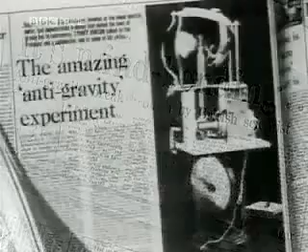So had Laithwaite come up with an anti-gravity machine, a device which could rise in the air without a source of energy to propel it.

The issue has never been fully resolved to anyone's satisfaction. Most people believe it absolutely didn't work, and others believe that it worked very well, and there was a conspiracy of some sort to cover it up.

Ezekiel is describing a flying, spinning, glowing, metallic object that ascends and lands in front of him.

In the modern age, what we see are flying, glowing, spinning, metallic objects that ascend and descend, just like the objects that are described in the Bible. It's not an illogical conclusion to assume that these craft that we see today may be the exact same craft that they're describing in the Bible in ancient times.

Their construction being, as it were, a wheel within a wheel. When they went into any of their four directions, without turning as they went.

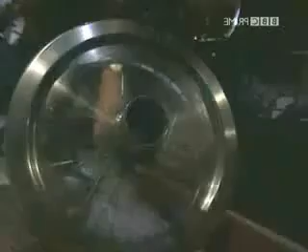The four wheels had rims, and they had spokes. And their rims were full of eyes roundabout.

What I believe he's talking about is devices, mechanical devices. And in the time that he was discussing this, there was nothing mechanical. The wheel was about the most sophisticated device that they had.

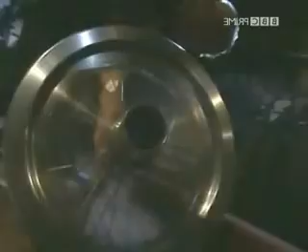There is no way I can pick that up with one hand, not above there. I'm not a strong man, I don't do weight training. But when it's spinning, it's another matter. Release it, and it begins to climb almost on its own. No strain on my arm at all.

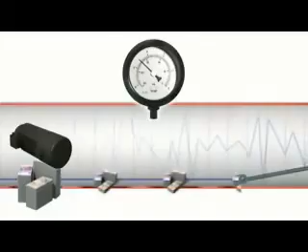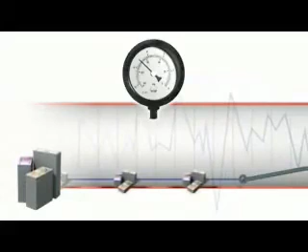While variable speed technology has been used in industry for a number of years, the limit of this technology has always been in the inverter duty induction motor. Restrictions on operation of the motor have prevented the variable speed compressor from reaching its full capability. With the Nirvana hybrid permanent magnet motor, the full capability of variable speed control is unlocked, resulting in unrivaled reliability and efficiency to the compressed air system.

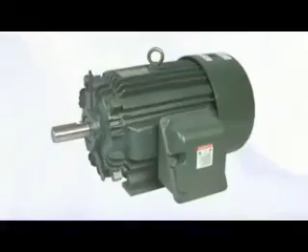To fully understand the benefits of HPM technology, it's essential to first understand the induction motor and how it operates. The stator has multiple slots, which are filled with winding coils in the form of a span. In a three-phase motor, 1/3 of the spans or coils are dedicated to each of the three phases.

The rotor of the motor is made of steel laminations stacked on a steel shaft, with a cage of bars and rings cast in to form poles. The rotor shaft is supported by bearings and rotates within the motor's stator.

The induction motor works by electrical power creating electromagnets. Attraction of the rotor to the stator coil produces rotational movement. Direction and power is dependent on the stator coil firing order, the strength of the flux, and the amount of rotor slip.

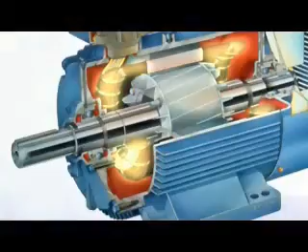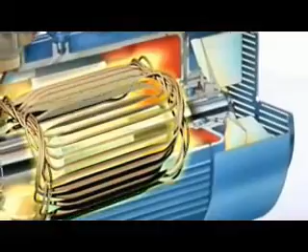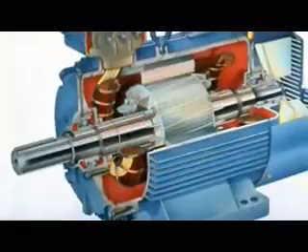The long stator with overlapping windings at each end not only restricts application of the induction motor, but also introduces a significant failure risk, resulting from overlapping coils, which are subject to hot spots and insulation breakdown. Excessive currents are required to initially magnetize the rotor and start rotation. Frequent starts can rapidly overheat the motor.

In contrast, the compact synchronous HPM motor, thanks to the permanent magnets, avoids high starting currents, delivers constant torque, and utilizes simple stator winding coils on salient poles.

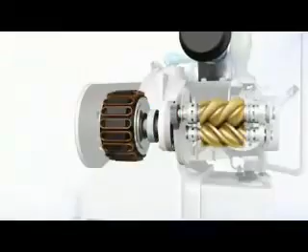Enhancing reliability, the compact HPM motor mounts directly to the compressor unit shaft. This eliminates the need for motor bearings, reducing the number of moving parts in the system. Additionally, this unique design ensures alignment of the motor and air end, and does not require flexible couplings or gears, which wear and reduce reliability.

Nirvana's constant efficiency design allows the motor to reduce speed and power consumption without losing efficiency. Furthermore, Nirvana's unique capabilities allow the machine to start and stop as often as required, enabling the compressor to deliver the smallest volumes of air efficiently.

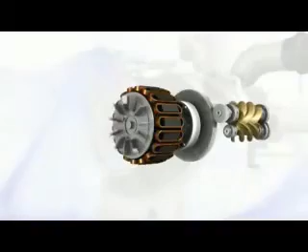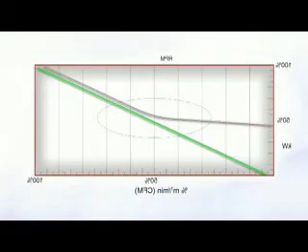Induction motors lose efficiency as they reduce speed to part load the compressor. This forces many competitive machines to operate at less than optimal conditions through the majority of the applied speed range. In order to protect the induction motor, competitive units frequently continue to operate the machine unloaded when air delivery requirements are below minimum. This approach puts unnecessary wear and tear on the system and wastes electrical power and resources.

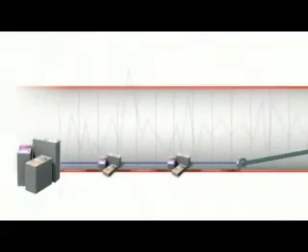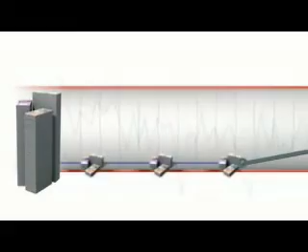The Nirvana HPM synchronous motor improves balance in the power supply through a consistently high power factor, harmonizing speed to the drive frequency and eliminating slip, thereby reducing billing rates and playing an important role in overall facilities management.

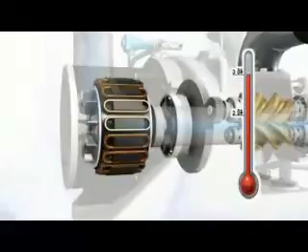Unlike standard motors and frequency drives, which are rated at 40 degrees Celsius, the Nirvana HPM motor and matching drive are conservatively rated to operate continuously in temperatures of up to 46 degrees. The Nirvana hybrid permanent magnet motor delivers superior value through leading innovation.